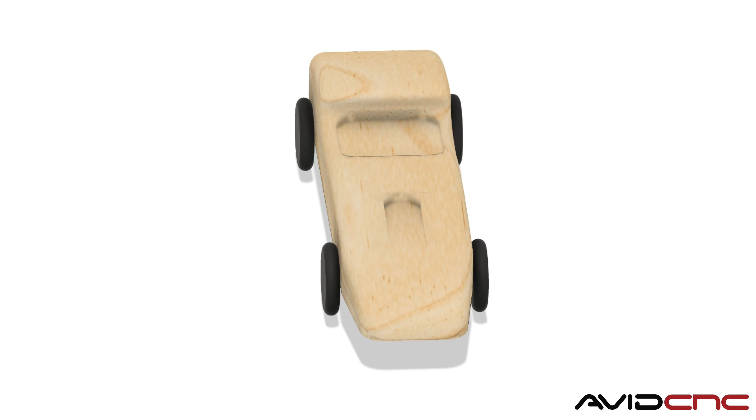I'm really excited to share a recent event we got to participate in and to show you the workflow for the Grand Prix Pinewood Derby cars. If you're interested in making your own CNC Pinewood Derby car, we're going to go through the whole CAD, CAM, and work holding workflow. I'll set some timestamps so you can jump to that if you like. Otherwise, stick around for some amazing interviews and context for this larger project. Even if you're not into making CNC Pinewood Derby cars, I think this workflow will still be very interesting because we're going to be focusing on production processes, efficient machining, and how it relates to CAD CAM workflows.

Now we're going to go talk to Tammy, the girly shop teacher, who helped organize this event in tandem with the Girl Scouts. Then we'll get to talk to two amazing designers who contributed to the project as well and designed a couple of the cars that we'll be making today. All right, let's do it.

Hi, Tammy. Thanks so much for joining us today. Oh, thank you for having me, Sami. It's always awesome and incredible to work with you.

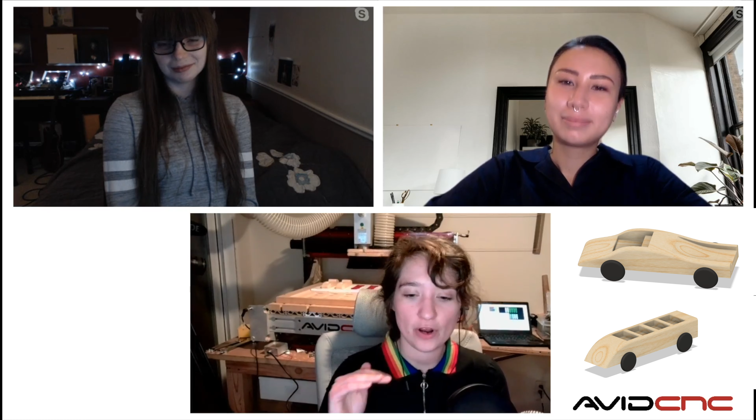Right, because you can add additional weight to your car in order to hit that weight class. You have to have your car between 4.5 and 5 ounces, and having those recessed areas already cut out for you definitely makes it easier.

Alice, what did you take from inspiration, and how did your previous history of participating in events like this influence how you designed your car?

Yeah, as a Girl Guide, I had a lot of fun doing it. It was really my favorite part of the whole year. I guess I just took everything that I wanted to do back then but didn't have the ability to, and now we can do with awesome tools like CNC, and started to have fun with it and shape it into something that looked really aerodynamic and sleek and interesting. I ended up pulling up a whole bunch of different concept cars and not really following any of them, but appreciating the lines on them and coming up with something myself, inspired by those.

Awesome. Well, that's wonderful to hear how you would consider the engineering aspect of it, the aesthetics of it, and pre-existing forms that are out there that can help influence that.

I guess I want to ask also both of you, if there's anybody, a kid or an adult, who's really interested in getting into digital fabrication, what kind of advice you might give them as they're getting started.

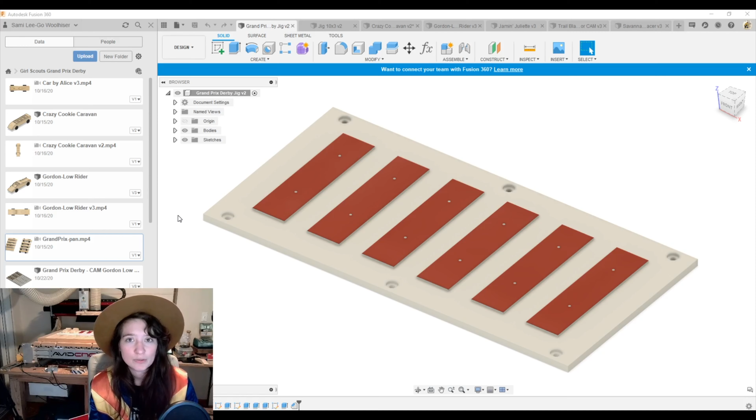If you're going to do somewhere around 30 to 50 cars, I might make a jig, but a jig that might be disposable. So let's look at what that might look like.

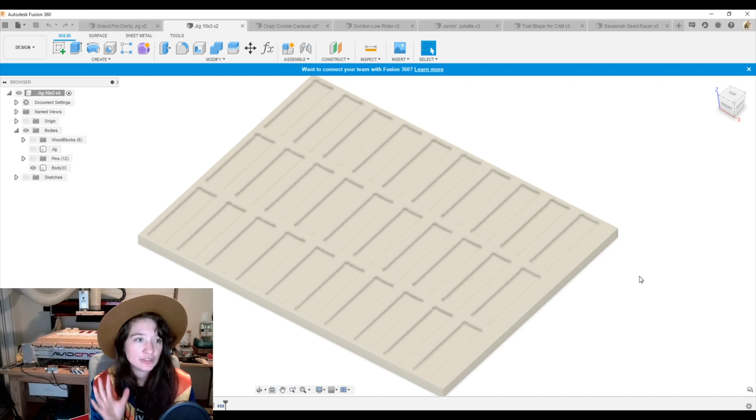I modeled this in Fusion, and this was just meant to be a temporary, quick, almost disposable jig. It could be made out of MDF or plywood, whatever you have on hand at the time. I pocketed out a bunch of rectangles with dog bones so that the blocks could be easily inserted and then screwed in from the bottom.

This was a great way to set up 30 blocks in set predefined locations that were easy to locate the jig, zero to the jig, and set the CAM. The advantage here is that it's really fast and easy to make.

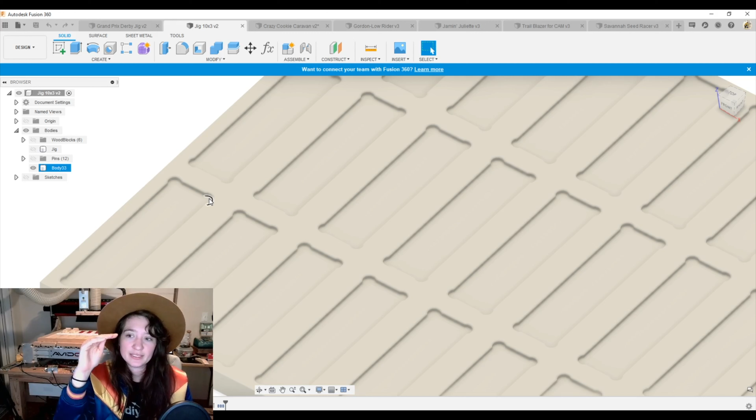Unfortunately, the disposable aspect of it is because the blocks have to be set below the surface. So if I set the block down in here but want to machine all 5 sides besides the one being screwed and held against the jig surface, I might end up cutting into the jig, which makes it difficult to use these walls as registration lines later on. That's why it's disposable, but it's still a pretty quick and easy thing to do.

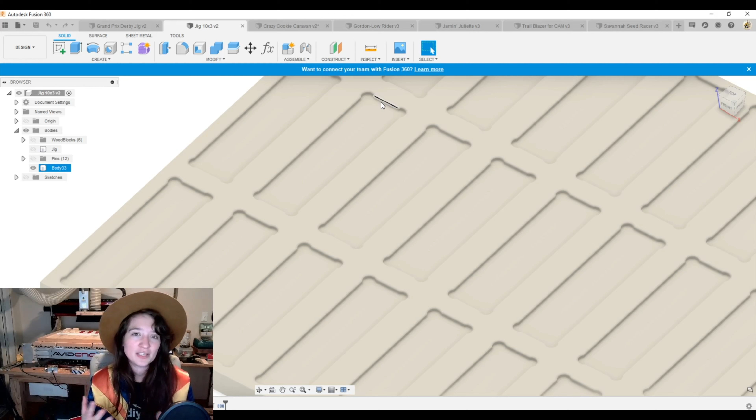So if you're making somewhere in the neighborhood of 50 cars, I feel like this is probably the way to go. Okay, now let's go look at our repeatable jigs.

Avid CNC has done a couple of Mini Maker Faire events, pop-up booths where we brought a couple CNC machines and cut Pinewood Derby cars for kids to make and race, which is super fun. But if we're making in the neighborhood of 1,000 cars, or really anything more than 100, you'll want something that's really repeatable and easy to change out.

There are 2 different types of jigs we made for this, going through a couple different iterations at different Maker Faires to try to refine that workflow. This one is made out of HDPE, which is a perfect material for this.

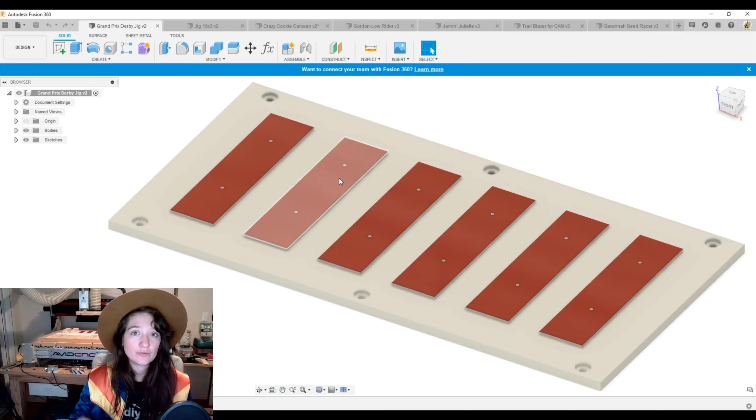You just set your blocks on top and then either screw them in from the bottom or insert bolts from the top. So there are 2 different types of jigs here, and I'll show you the setup. We can either set the blocks on top that do not have any countersunk holes in them.

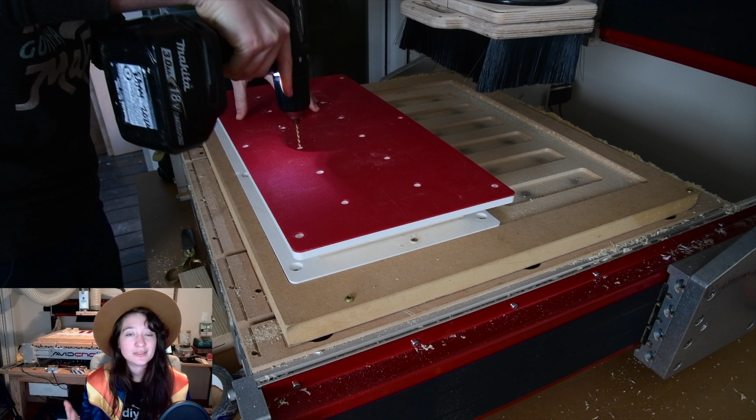I'll set a little bit of double-sided tape on the red surface, place the block on top, then flip it over and screw it in from the bottom. These screws are in known locations, so when I design the car, I make sure I'm not going to be hitting these screws when I do my CAM.

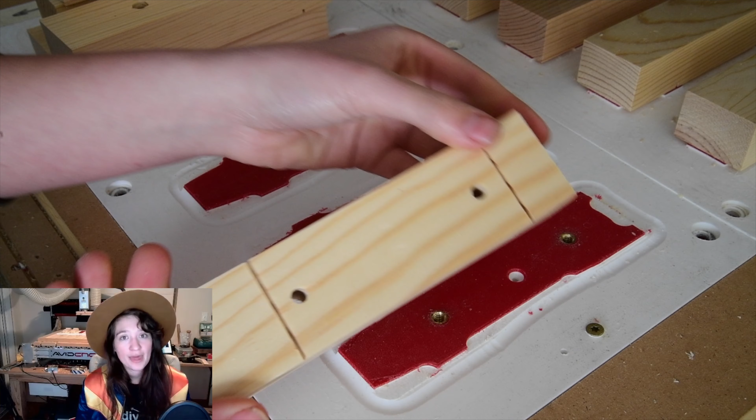The other method would be to pre-counterbore and drill holes from the top surface of the block, then put bolts through the block into the jig, into threaded inserts. This is a great method because you don't have to flip the jig over to remove the blocks - you can simply remove the bolts and switch in new blocks, but it does take more time to prep the material ahead of time.

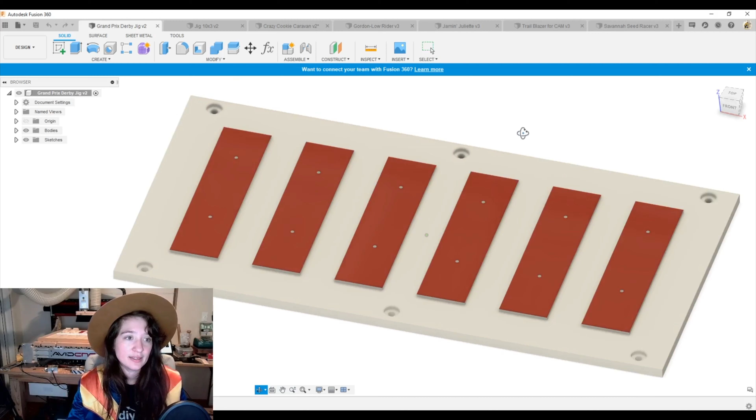So those are the 3 different methods I would reach for. If you're making 1 to 10 cars, I would reach for double-sided tape, or the blue tape and CA glue method. If you're making between 10 and 100 cars, I might go for a more disposable MDF jig. And finally, if you're making more than 100 cars, I would recommend making a really repeatable jig such as this HDPE method. I've linked to the files of the disposable and repeatable HDPE jigs below.

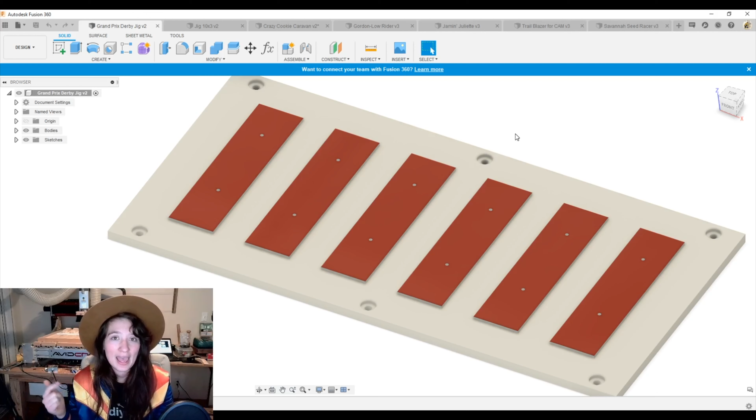Okay, so now let's go ahead and talk about the different cars that we've made. I'm just going to go through and show you these different designs. We won't go too much into the specific designs individually because I do want to share more on the CAM side of things. But we did give all of the cars really fun Girl Scout names, so if anybody was a Girl Scout, let us know if you recognize any of these references.

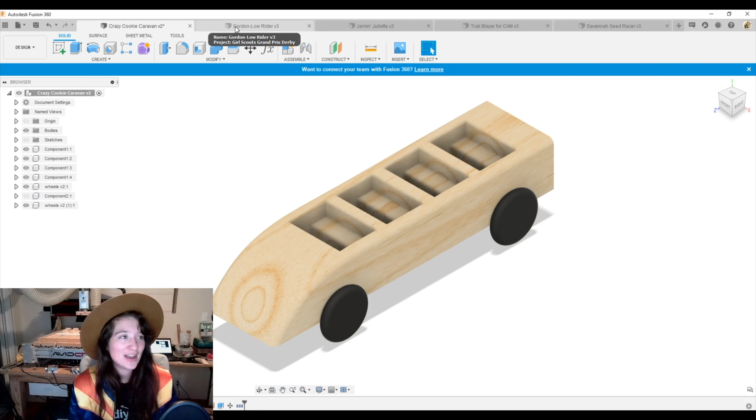So we have the Crazy Cookie Caravan, which was designed by Eileen Tran. Thank you, Eileen, for your contributions. This was definitely a popular design that was chosen. I think one of the really cool things is that when you make this car, you have to aim for a weight between 4.5 and 5 ounces. So sometimes you want to add additional weight to your car. These recesses here, these little seats, allow for additional weight to be added fairly easily. You don't have to recess another pocket for the extra weight to be added.

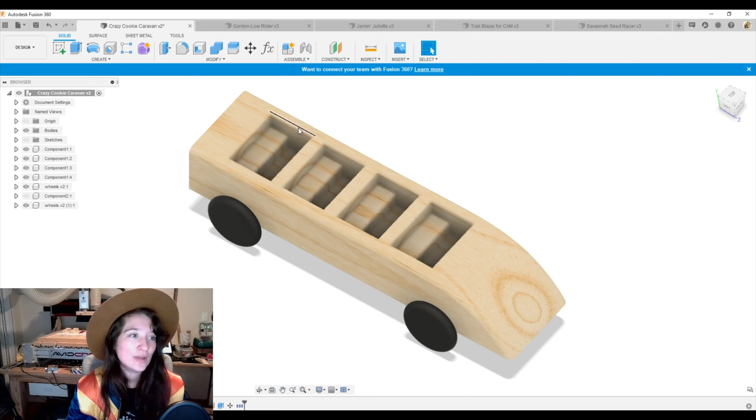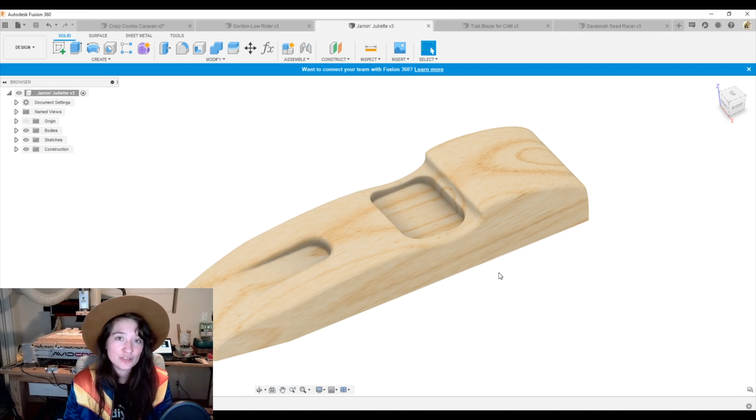We also have the Gordon-Low Rider, which was also designed by Eileen. I liked this one as well because it did have a little bit more of that aerodynamic movement and also having a recessed area. We have the Jammin' Juliette, and this is one of the kind of original Avid designs that we've made at a couple different Maker Faires. I remodeled it here for us to be easier to machine and easier to use in Fusion.

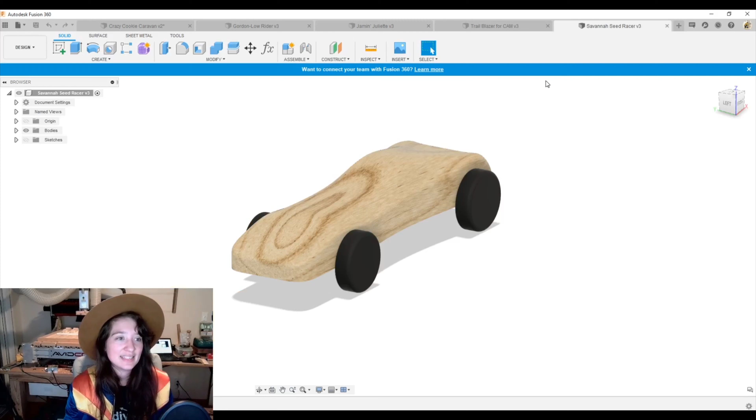We also have the Trail Blazer, which is of course a nice pickup truck for you woodworkers out there. This also has the great pocket in the back for extra weight to be added later on. And lastly, we also have the Savannah Speed Racer, which was designed by Alice. And this was by far the most popular. I had to cut about 100 of them for this most recent event. And definitely very sleek and kind of a classic racer.

Savannah Speed Racer. Now let's go ahead and jump into the CAM setup.

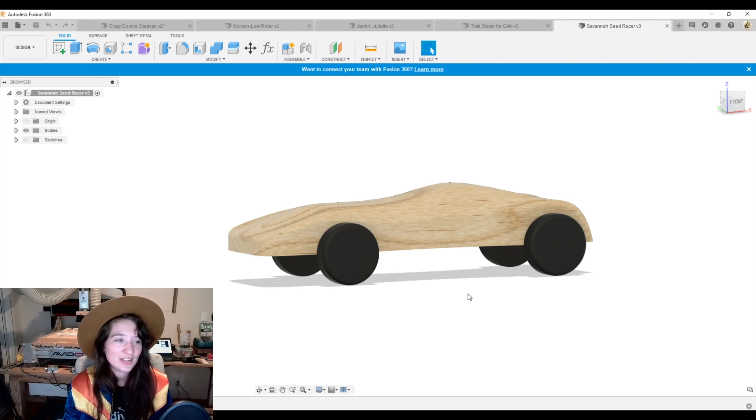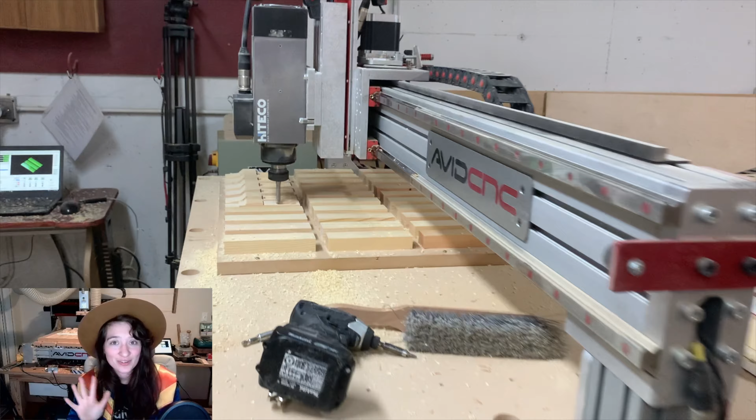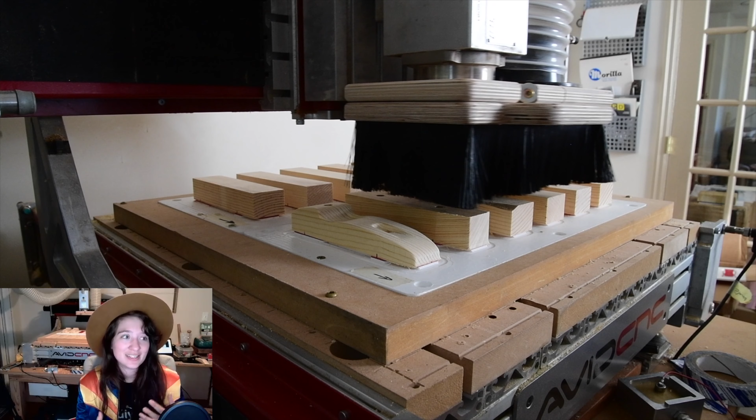So when I start to approach a project like this, I really want to consider what my workflow is going to look like when I am the operator, the programmer, all at the same time. So when I am doing the CAM setup for 5 different car designs, I have to kind of really think about the workflow with different jig setups for different machines, different spindle capabilities, different feeds and speeds. So I was kind of juggling a lot of these different things, but it really helps when you have a project like this, even if it's a really fun project, especially when it's a really fun project, it makes it a lot easier to take that time to learn and to really practice refining those workflows.

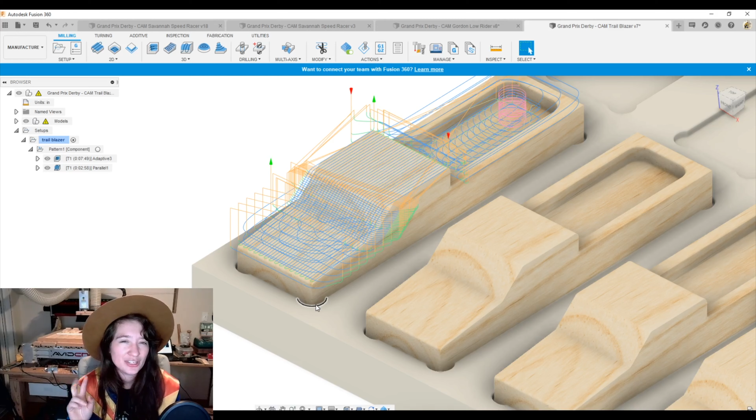So let's dive into the CAM on the Trail Blazer here. As you can see, I have my truck nestled in here. And the reason I said that this jig is kind of more disposable is because if my router bit were to contact the jig to cut out the profile shape of something that was a little bit more formed than the truck, I might damage the pocket here, so then I wouldn't be able to re-register new fresh blocks. So with the Trail Blazer, because it wasn't doing a profile, it was only doing machining on the top surface, it was a lot easier for me to preserve this jig for longer.

So here I am going to show you the different toolpaths that I have set up. I am going to go into this setup. I'll double click here. All right, so let's go ahead and jump into the Trail Blazer setup here. I'm going to go to Trail Blazer and I will look at my setup here.

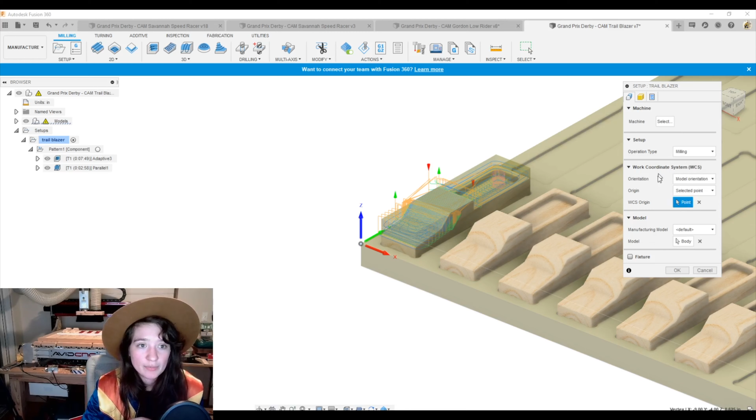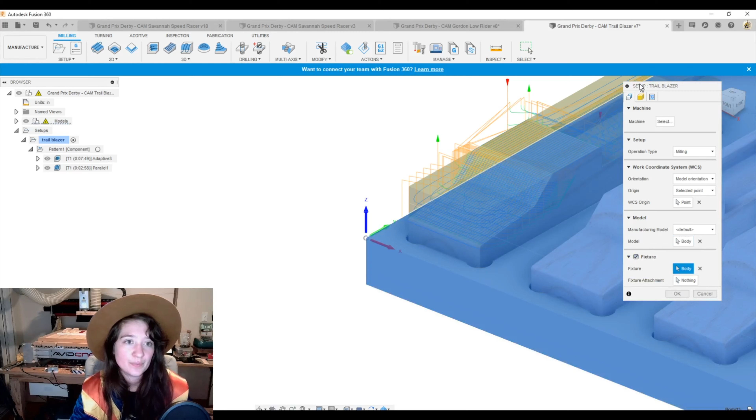So I have a milling operation. I am looking at my work coordinate system. I want to zero to the jig. It'll be a lot easier for me to zero to the jig than to a block that I've set into the jig. So let's go ahead and look at what body I've selected. I've only selected one of the components, the first component, which is the truck here. I can also select the fixture if I'd like. And when I go to my stock, I've also modeled the blocks as well.

So if you like to model your stock, that's something I really like to do. It really helps me visualize what I'm actually machining here.

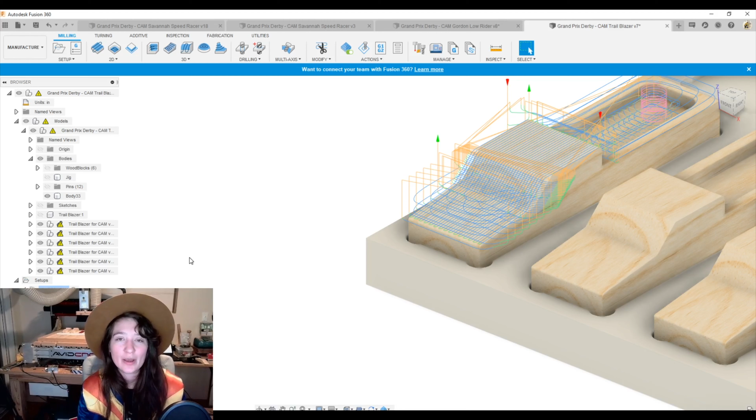Now let's talk about what type of toolpaths you might choose for something like this. If you're cutting 1 to 10 cars, I might take a little more time and be more generous with the quality of the finish, so I might go for a 1/4 inch ball nose instead of a 1/2 inch ball nose. But when I'm really trying to machine 300 cars, I need to be more particular about how much time is spent on each car.

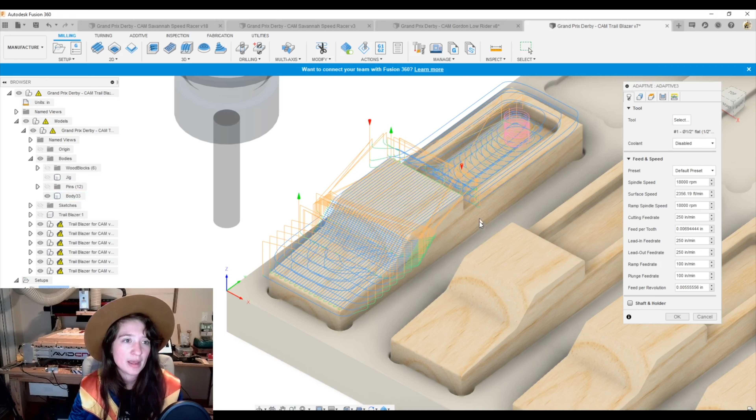So the first one I did was an adaptive toolpath, so we're going to open this adaptive. This was definitely more of a roughing toolpath, and for this particular setup I just went with a 1/2 inch down spiral end mill, so it has a flat bottom. I knew I was going to have to do a smoothing pass on the surface of the hood of the car, but for most of it I really wanted the straight square edge on the bottom of my pockets. So here I have selected the 1/2 inch flat end mill, and I have my different feeds and speeds set, about 250 inches per minute and a ramp and plunge feed rate of 100 inches per minute.

Let's go into the geometry. So here I just have the model selected, and I click include setup model. That will just include the model I've already selected in the setup, so that's all I need to do there.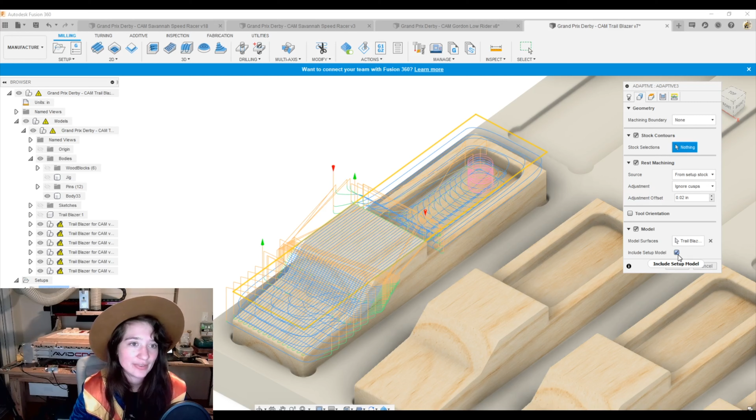When I go to my different heights, I can inform it how deep I'd like it to cut, if I wouldn't like it to go to any different surface. But go through and hover over these so you can get a little more information on each setting.

Now I'll go into my passes. Here is maybe where I might be particular about how much material I'm actually removing. So I have a 1/4 inch step down, which is my maximum roughing step down, which when I'm doing an adaptive toolpath, since we're using pine which is super soft, I don't have to worry so much. So I'm just going to change my minimum step down here to an 1/8 inch.

I might even click this flat area detection so it really knows, oh, I need to refine this surface. This is a flat bed here, I need to clean up this edge. I can select stock to leave, but I don't think that's super necessary here in this case.

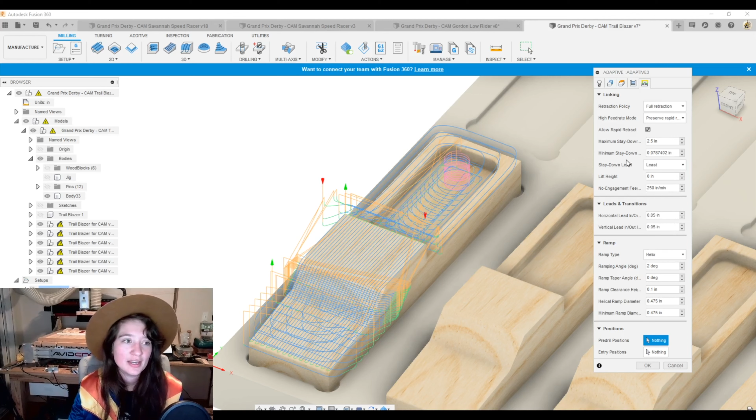We just go through all our settings, double check, and then we'll go through our linking. We're just going to say this looks pretty good. I think one thing to note is exactly how often it will stay down or lift up, so I have that set to least, to try to reduce how often the router bit or the spindle will lift up.

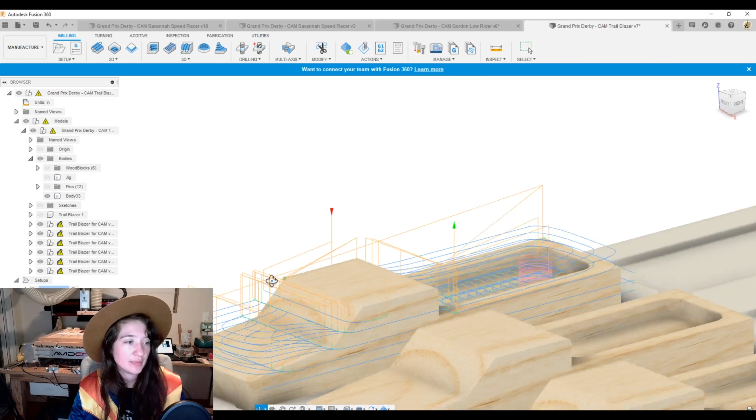So we'll say okay. Now I have a super rough toolpath here, but it's really clean enough for the truck bed, as well as the lip around the truck bed and the top surface. I'm really being left with this stepped preview here, so I want to make sure to clean that up.

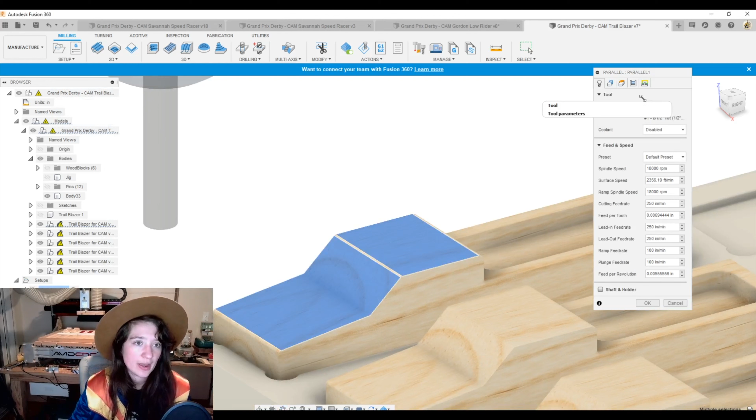So I went with a parallel toolpath. Let's just open that up and check it out. I have these surfaces selected, and I'm still going to stick with the 1/2 inch down spiral, with very similar settings. So we'll go over here to the geometry, I have the 3 faces selected, and I might even be able to zoom in here and select my little radius.

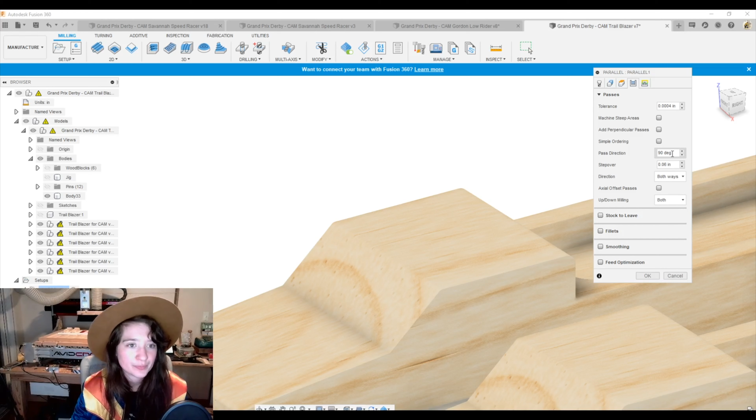Perfect. We'll go into our passes here and double check what those look like. I've adjusted my pass direction to be 90 degrees, which means it will be going with the grain. I'll say okay.

So here now we have our parallel toolpath, which is just going back and forth to clean this up. I've made this step over a little bit smaller just to make sure that was clean and pretty easy for a scout to sand when they got their car.

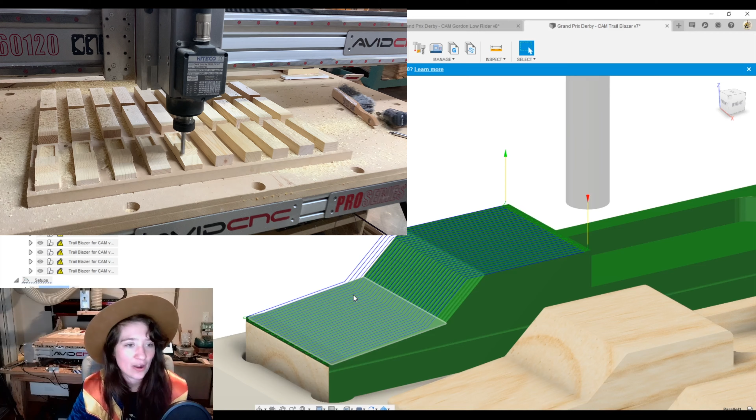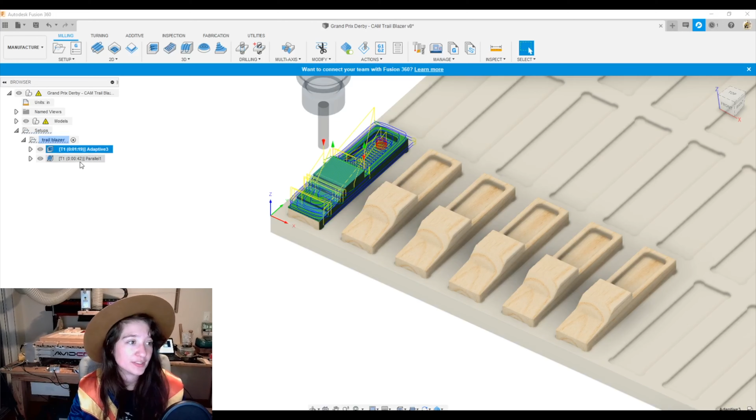Okay, so now we have our toolpaths, but only for this first car. As you can see here, I have 6 laid out currently because I have these patterned out in the design workspace. So now I have my 2 toolpaths here that are for my first car, but as you can see, I have 6 laid out right now. I just patterned the component in the design workspace.

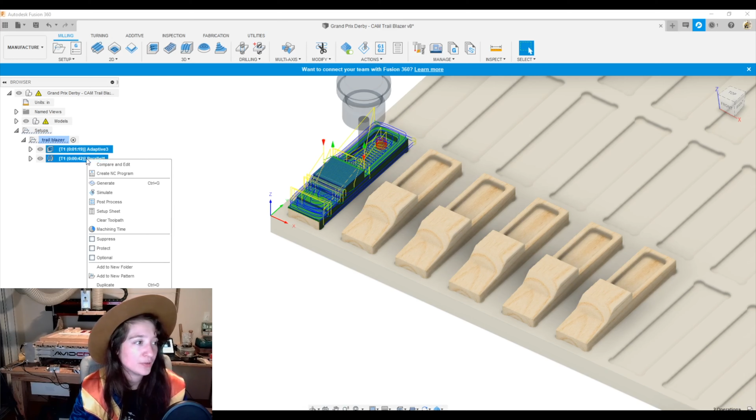A really cool thing you can do, which helps with creating efficient layouts for something like this, is if you select your two toolpaths here, right click, and go to add to new pattern. Here we can create a pattern with this particular toolpath. I go to pattern type and select component pattern, then select my source, which is my original component. It will detect any component patterned off of that and automatically copy the toolpaths to those other components as well, which is exactly what we want. So we'll say okay. Great.

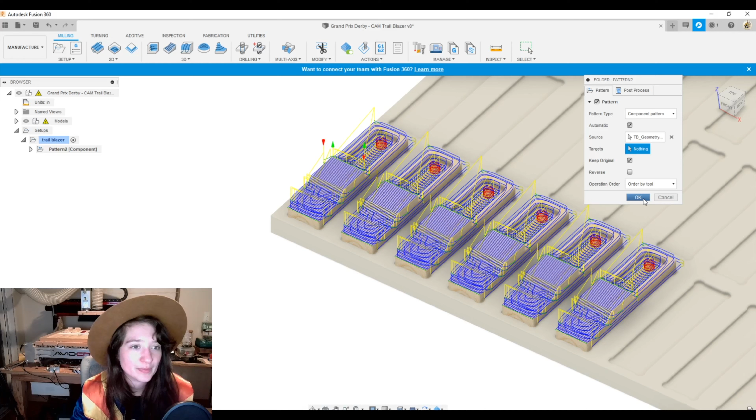And now we have our patterned toolpath, and we're able to go ahead and post-process that.

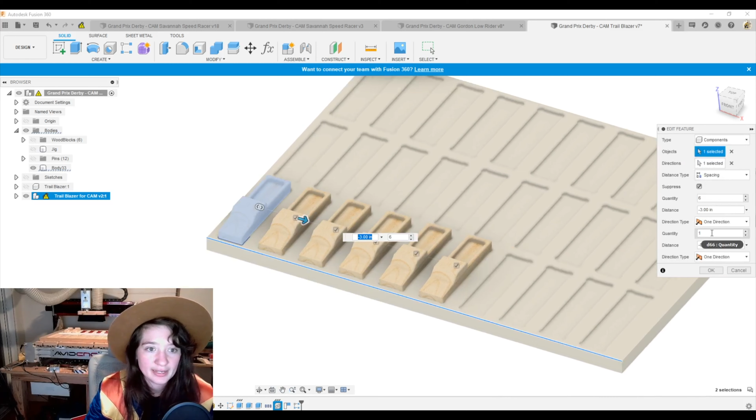If I go back to the design workspace and edit this particular pattern here in these copies, I might also add a row back here, and let's make this 10. I'll say okay. So now I have 30 cars laid out.

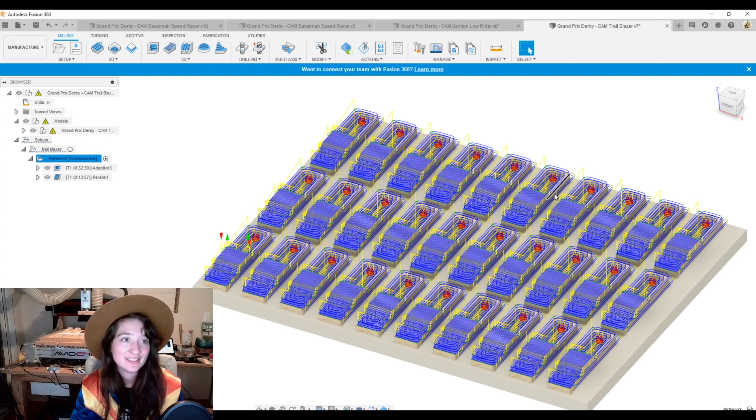If I go back into my manufacture workspace, I can see that my toolpaths have automatically been patterned to all of the components that I copied from our original Trail Blazer. So now we can go ahead and post-process and load it up onto our machine.

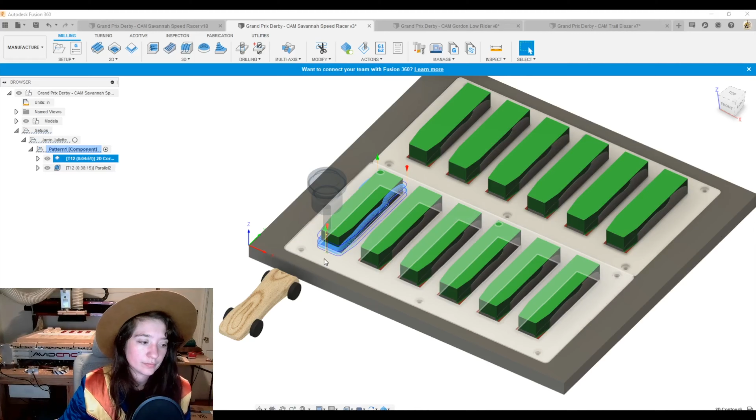Okay, so let's talk about the CAM for the Savannah Speed Racer, which is also super similar to the Jamin Juliette. Those ones have a smooth surface, pretty round, and weren't too difficult to plan. So let's go ahead and look at this.

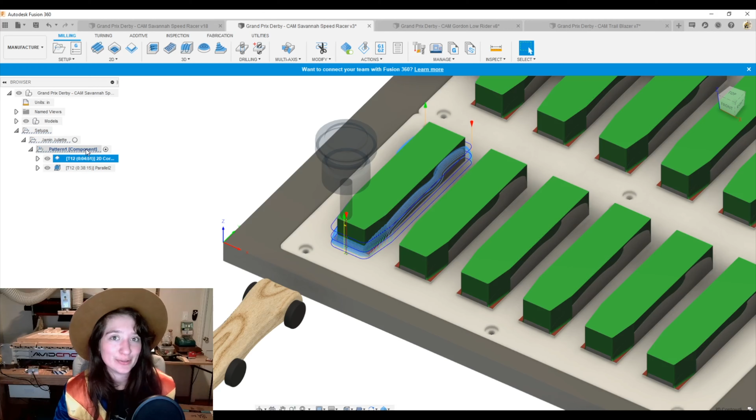I've also patterned this toolpath as well, and we'll go look at this setup. In this case, I've used 2 of my HDPE jigs, one in the back and one in the front, and another piece of MDF that I'm temporarily attaching to my spoil board. I've machined a pocket into this MDF plenum for me to place the jigs.

So if I have 4 jigs, it's really easy for me to put 2 into the machine and have 2 that I can prep and set up, and as soon as the cuts are done, I can switch them out easily. I have a register for me to place these in as well. You can use some threaded inserts in the MDF plenum to bolt down the HDPE jigs if you like. That really helped with the workflow to speed it up, having a couple of them going if you're making quite a few.

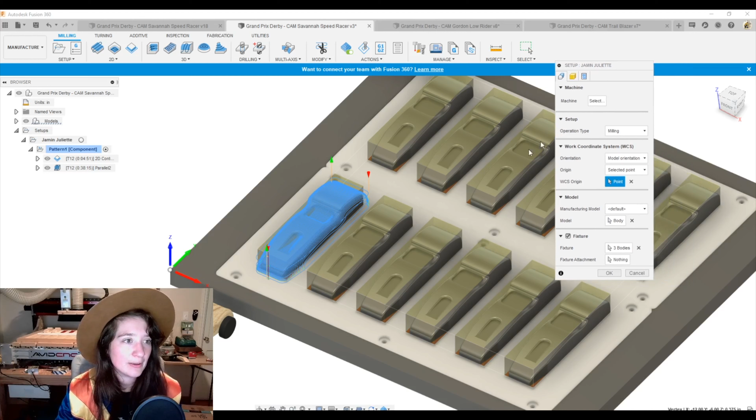So let's go ahead and zoom in and look at this setup. This is the Jamin Juliette here. We'll look at the fixture that's selected, and the stock that's selected here. We'll say okay, great.

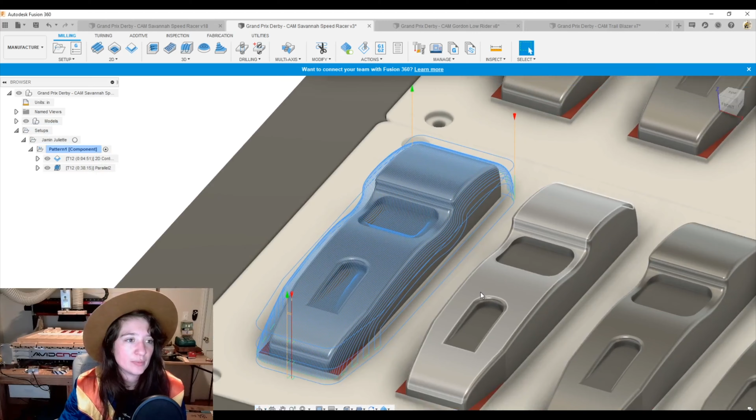So now let's go ahead and look at our toolpath. For this one in particular, I wanted to make sure the profile itself, the contour, was cleared up. So there is the contour toolpath, which is just a basic 2D contour. We'll open this up and look here. I'm going to turn this off. We want to disable our coolant.

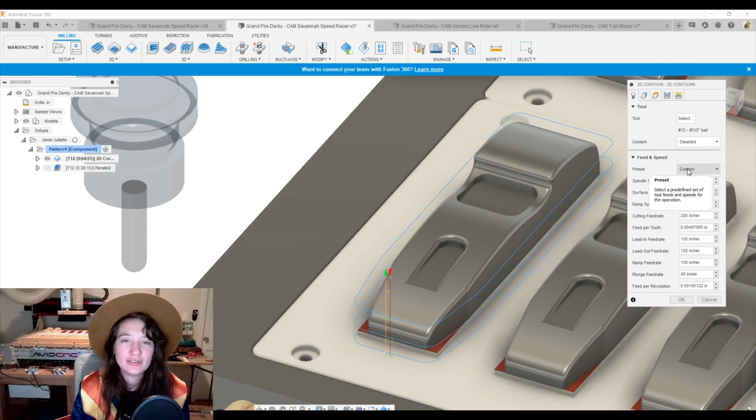The other strategy here that I wanted to apply was to reduce the amount of tool changes. So I just went with a 1/2-inch ball nose so that it was extended just enough, but not too far past my brushes on my dust shoe, so I can make sure to have maximum dust collection.

So I'll use the 2D contour as a roughing toolpath. It's not going to be too much on the surface of it, but to clean up this border of the profile. So here we'll go to the geometry, and I've selected this bottom contour here.

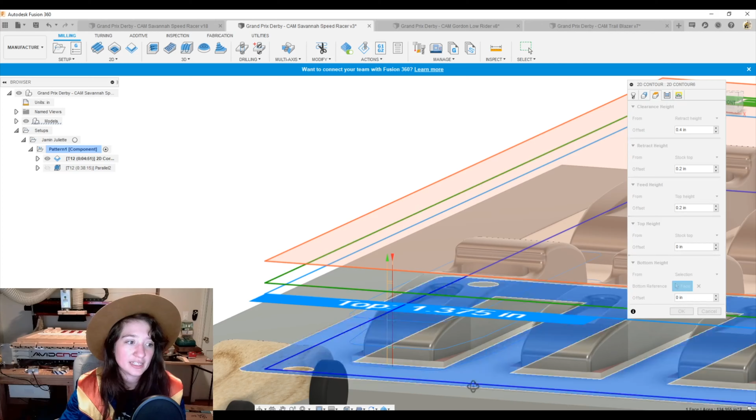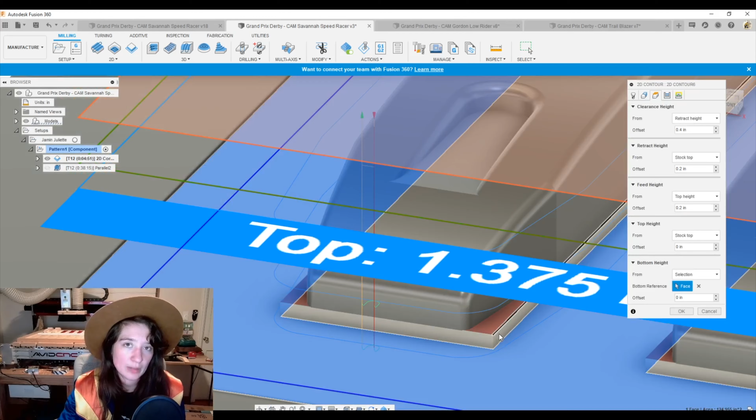The trick with the heights is that I didn't cut to the bottom of the car. In fact, I cut to this surface of the jig. You can see the car is sitting on top of a little ledge, and that ledge is where the car is used to register it to the jig. I wanted it to cut into this platform a bit, but not too much, enough that I'm still able to register the cars fairly easily, but enough that the curved ball end of the bit would surpass the front edge of the car.

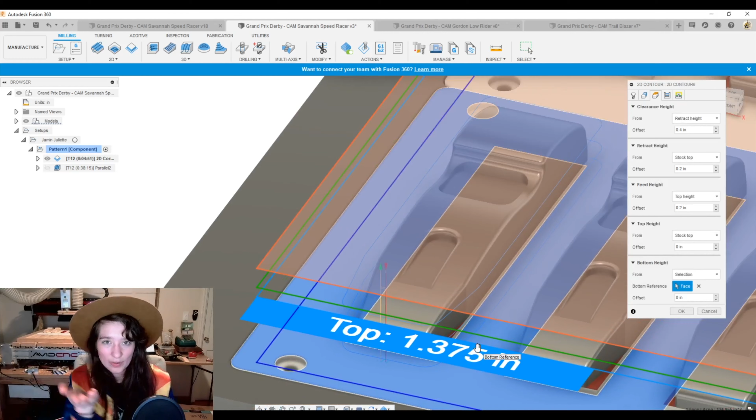So if I'm going to cut out this profile, I wanted to make sure that front tip wasn't curved, so I had to make sure to cut in a little bit deeper. So we'll say okay, and then we'll look into our parallel toolpath.

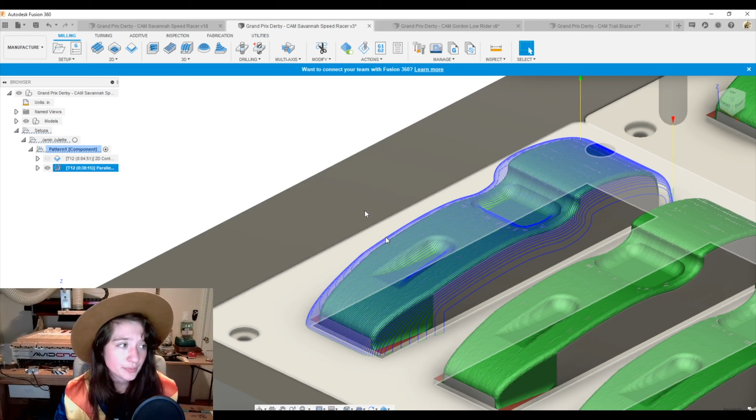So then I went with a parallel toolpath here, and I didn't even do a roughing toolpath. This was with the 2.2 kilowatt spindle. This worked really well on the 8.7 horsepower spindle as well. Really didn't have much to worry about in terms of material removal. So here I just went with a parallel toolpath, and since I didn't have time for a roughing toolpath, I just went straight for the finishing.

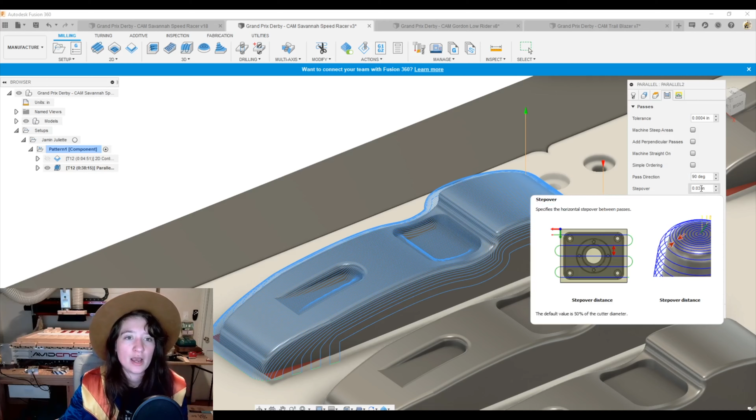So here we have the 1/2-inch ball nose, and we have our 200 inches per minute. I really ended up bumping that up to 250 when I was manually adjusting in Mach. And then in passes here, I think this might be kind of important: the step over I brought down to about a 32nd, 0.03 inches.

And for the direction, I said it can cut both ways. I wasn't really worried if it was cutting one way or the other, because the pine is pretty soft, it was going to be really easy material to remove. But these ended up coming out really super smooth and super nice, so I was happy with the results on this.

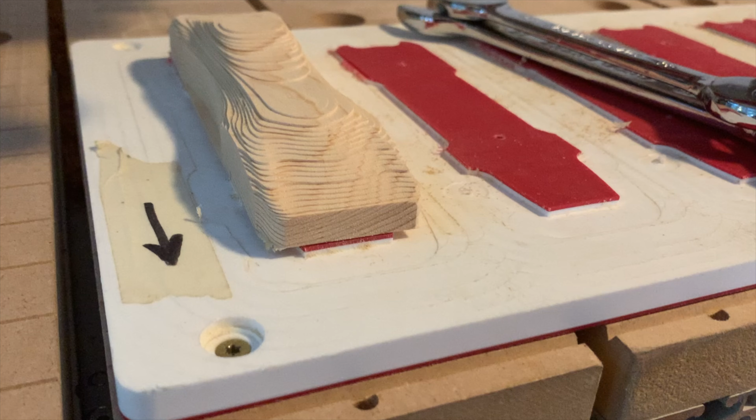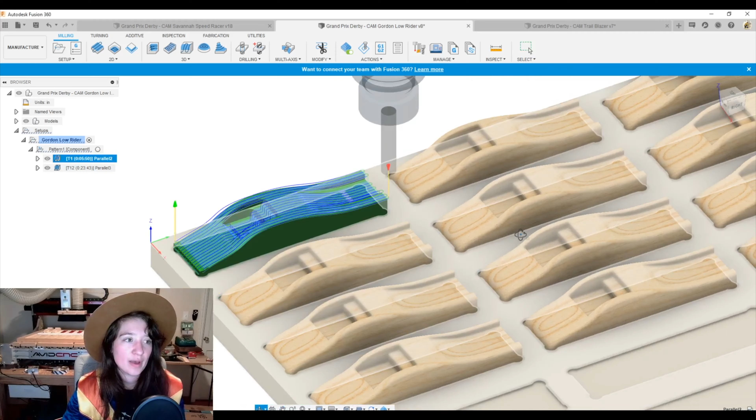Okay, so if we look at the Gordon Low Rider here, this is one that I didn't want to compromise too much on the finish. So I did include a tool change here. If I open this up, I first have my parallel toolpath, which was a roughing, but it was with the 1/2 inch bit here.

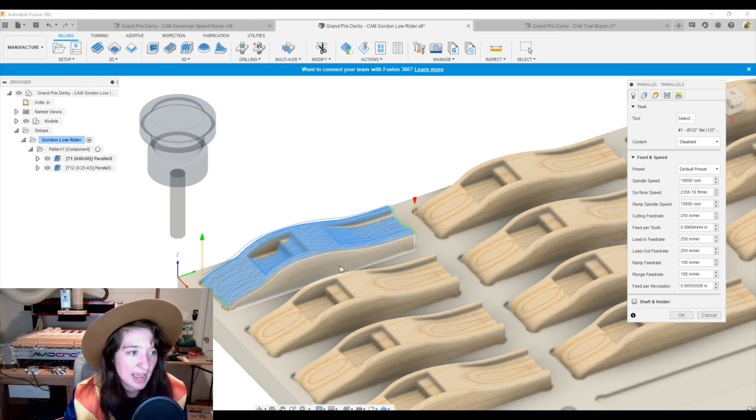So I didn't want to do an adaptive, I just went straight for parallel, and it had a lot of side cutting because it was removing quite a bit of material over here. So I went with the 1/2 inch tool there, and then I went for a finishing toolpath with a 1/4 inch ball nose.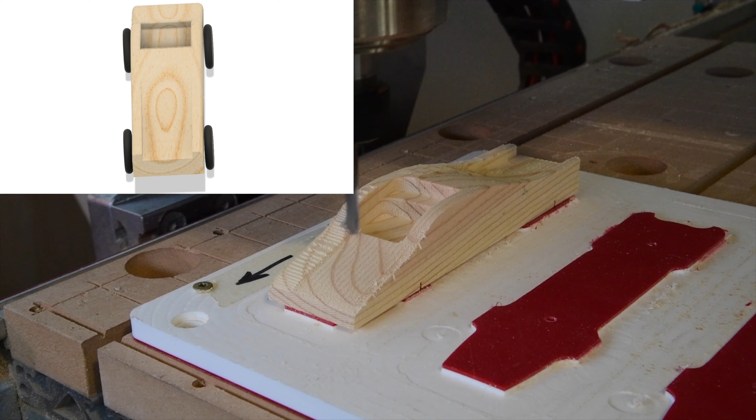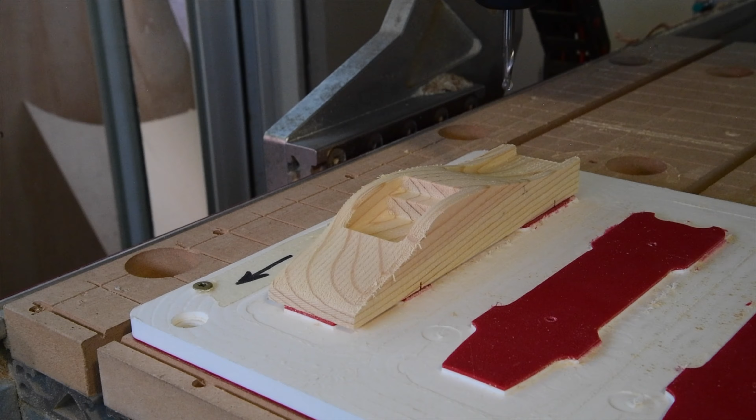So lastly, I have the Crazy Cookie Caravan, and this one was a little bit more tricky to plan the CAM because I wanted to make sure to get these little pockets down here. So when I first made the prototype, I went with a 1/4 inch ball nose for finishing and a 1/4 inch down spiral for adaptive clearing in here.

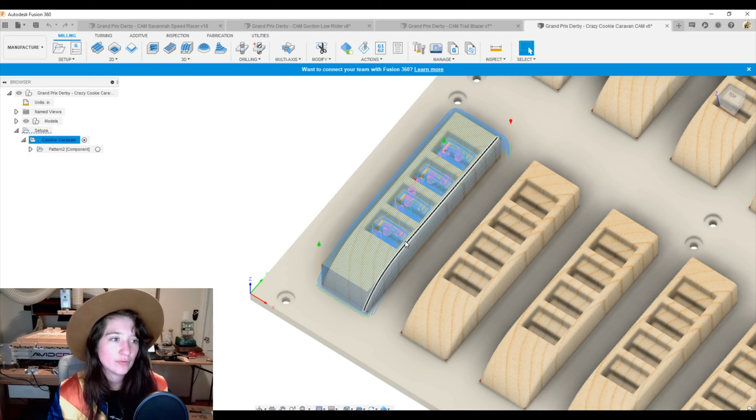But when I went into production, I ended up cutting with a 1/2 inch ball nose, and the seats had a little bit of a curve radius to them, and I ended up really liking that.

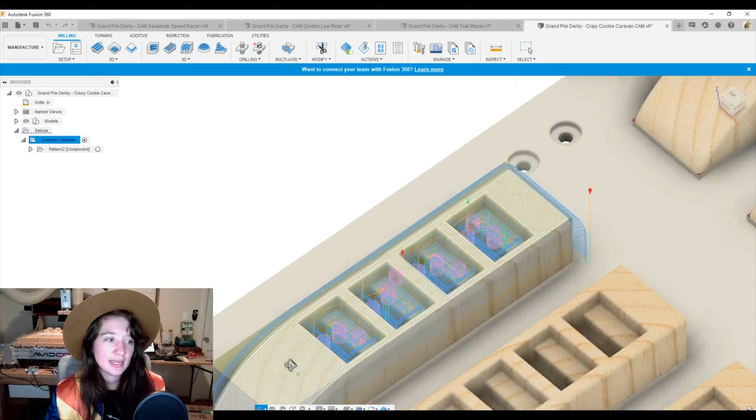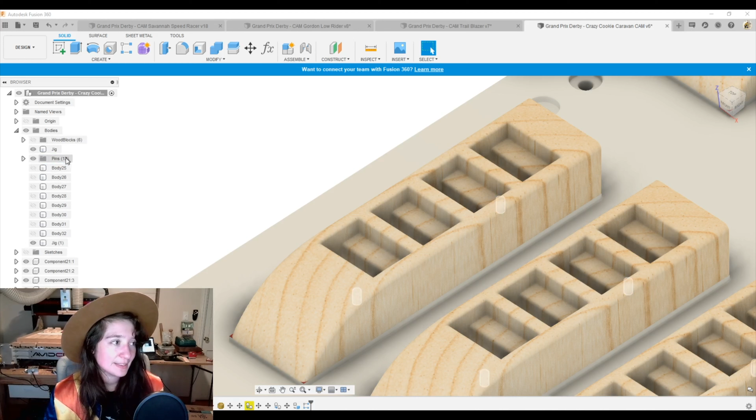The other challenge with this in particular was being sure that the screws wouldn't be hit by the toolpath. So I went ahead and modeled in the screws to make sure they wouldn't be hit by the router bit, because that would be a no-go situation. So when I go back into my design workspace here, if I go to my bodies, I can turn on pins, which are just the screws that I quickly modeled up in the locations that I knew they would be in and exactly how far they would extend.

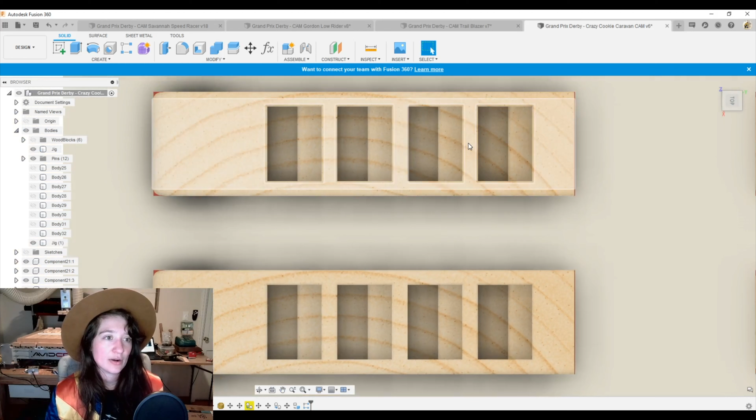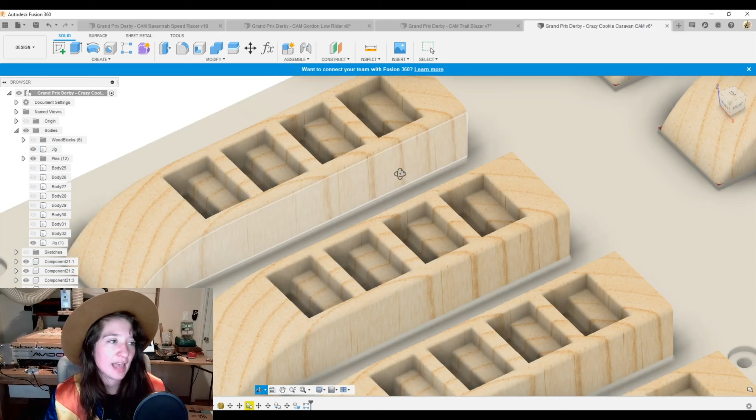So here you can see them highlighted, but when I click away, you can see they aren't quite pictured here because they aren't sticking through, but I am still kind of risking hitting them if they're not lining up too well. So let's go ahead and turn those pins on. You can see here, they are below the deepest cut, the deepest pocket, so we are safe. I think ideally if you're making a bunch of different cars, you might have a set limit on how deep you want to pocket, but in this case, it worked out really well.